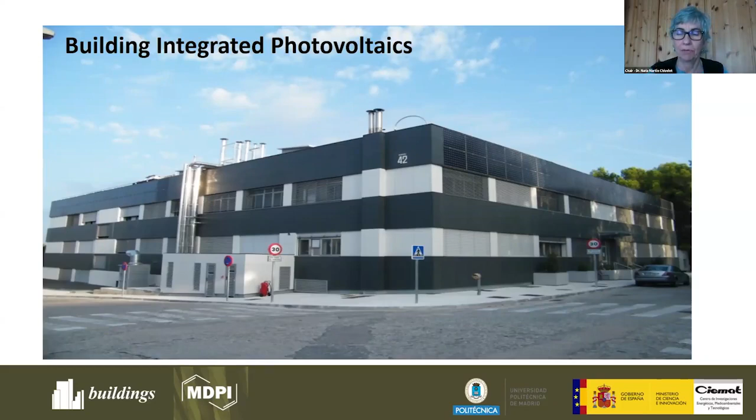So we have already seen the program, just to remind you that we will have two Q&A sessions after each presentation. And now it's the turn of Professor Lorenzo Olivieri. So Lorenzo, whenever you want, please.

Good morning. Welcome, everyone. Thank you very much, Nuria, Laura, all the staff for inviting me to join this very interesting webinar about a topic I am very passionate about. It's one of the most important research lines I'm working on for some years right now.

Today I will share with you my point of view about BIPV solutions and potential in building retrofit. When we speak about BIPV, we speak about energy, and we always have the same problem when we speak about energy.

Energy is a very abstract concept, really. We cannot touch energy, we cannot see energy, we can only see and touch the effects of using energy. So I would like to share with you some effects of using energy in order to train our sensibility, our intuition about energy-related issues.

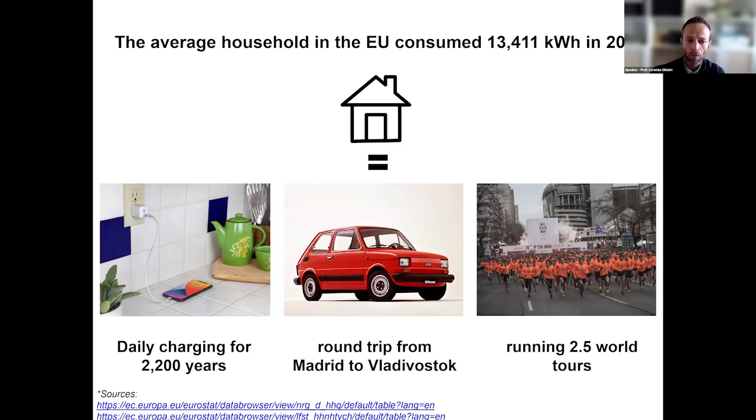You probably know that the European Union has established a long-term objective to be the first climate neutral continent by the year 2050. In order to reach this goal, an intermediate goal has been established for the year 2030. According to this intermediate goal, emissions should be reduced by 55% compared to 1990.

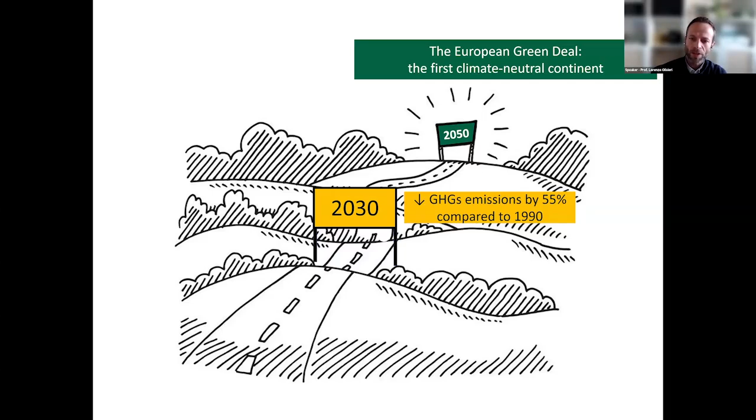So the big question here is how can we reach these very ambitious goals? Europe is working on a lot of measures in order to improve the efficiency and reduce the energy used in several sectors of our economy. There are many sectors not closely related to buildings, but there are two that are very closely related to buildings. These measures are called the Fit for 55 package.

If we have a look at the Renewable Energy Directive, it has been reviewed in order to increase the share of electricity coming from renewable energy technologies. The previous target was 32%, the new target is 42%. If we speak about buildings only, 49% of the energy used in buildings has to be produced with renewable energy technologies.

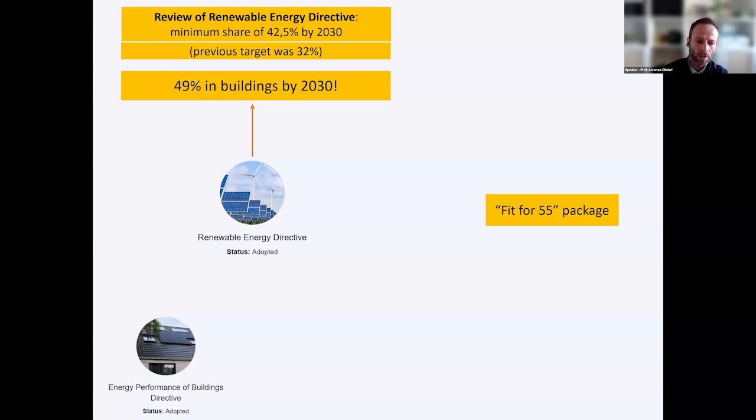The other very relevant directive we have to consider is the Energy Performance of Buildings Directive. The review of this directive establishes for the first time, in a very clear way, the role of solar energy in the built environment. So we have a long-term objective for all buildings to have zero emissions by the year 2050.

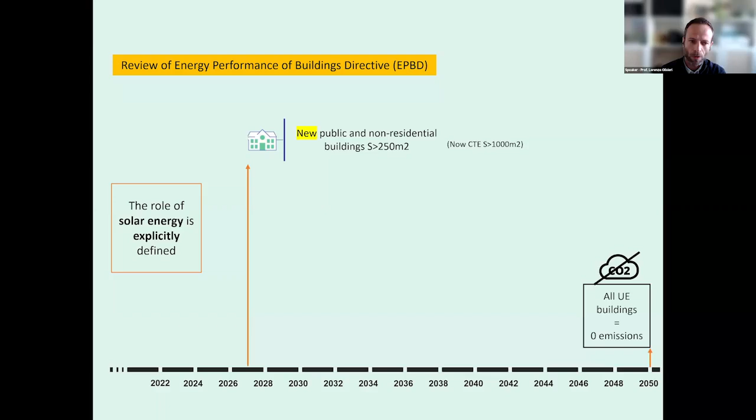Several intermediate steps have been established. For instance, for the year 2027, public and non-residential buildings bigger than 250 square meters should include solar technologies, either solar thermal or solar photovoltaics. It's not defined in the directive, but we know that solar photovoltaics use of solar energy is much more interesting and has a much bigger potential than the thermal use of solar energy.

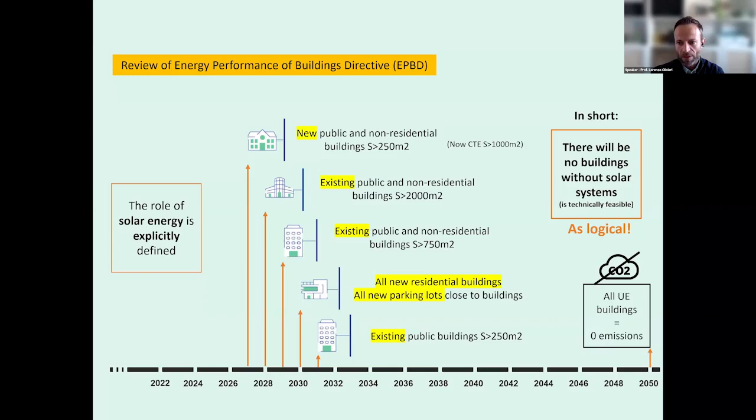In the next few years, existing non-residential buildings bigger than 2,000 square meters, and then bigger than 750 square meters, etc., will also include solar energy. So in short, we can say that there will be no buildings without solar systems in the next few years, obviously if it's technically feasible.

So we all know that rooftop PV systems, or distributed PV systems, are already a reality. You can see here in this graph the evolution of the PV capacity in recent years.

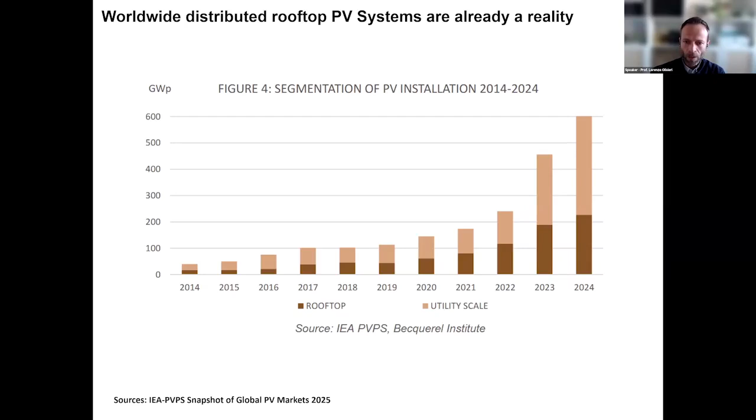About one third of the PV capacity installed is distributed PV capacity, normally on rooftop systems. So they already are a reality. In Spain, the situation is very similar, with about 500,000 self-consumption PV systems already installed, with a lot of them installed in the last 3 years.

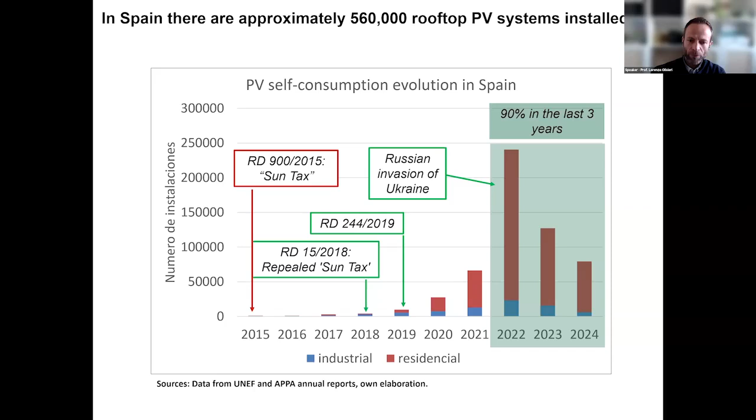So I would ask you: is this what we really want for our cities and towns? Do photovoltaic systems have to be ugly by necessity? Should we really renounce beauty for the sake of sustainability? I would share with you today that there are more options, and probably we have to increase the use of these new options, training professionals to use them.

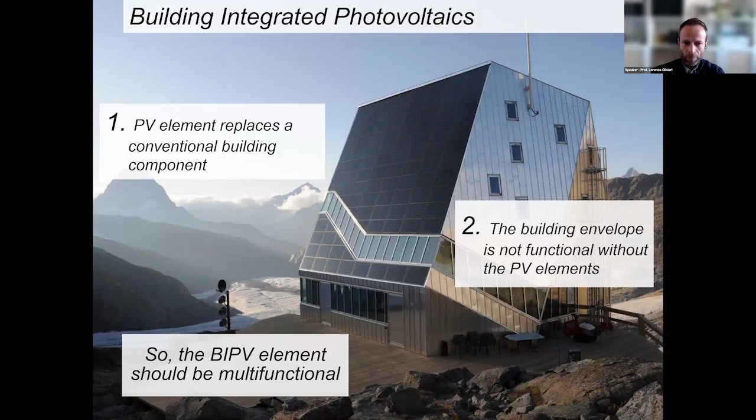This is very different from the typical system we're used to seeing in our cities, in which conventional PV modules are added to the building envelope, but the envelope is already functional without the PV elements. The PV element generates electricity—that's a lot, but it's not enough.

In my opinion, cities are the core of global climate change mitigation. The question is, what can we do to make them more compatible with our planet?

I would share with you the research project called RINGS BIPV, Innovative Global Solutions with Building Integrated Photovoltaics, which CIEMAT and UPM are collaborating on in order to spread the use of BIPV. This research project is being funded by the National Spanish Program, a research program oriented to the challenges of society.

We are working on two main projects in a coordinated project: advanced modeling and forecasting of the BIPV modules and system, mainly CIEMAT is working this topic, and Jesus will speak about this research line. The BIPV solution for rehabilitation project at UPM mainly.

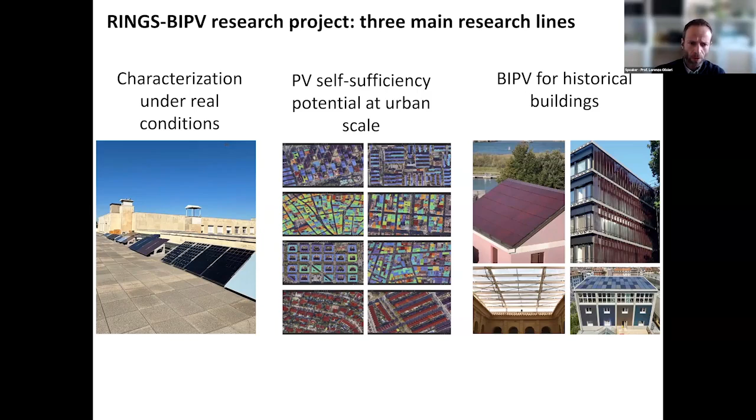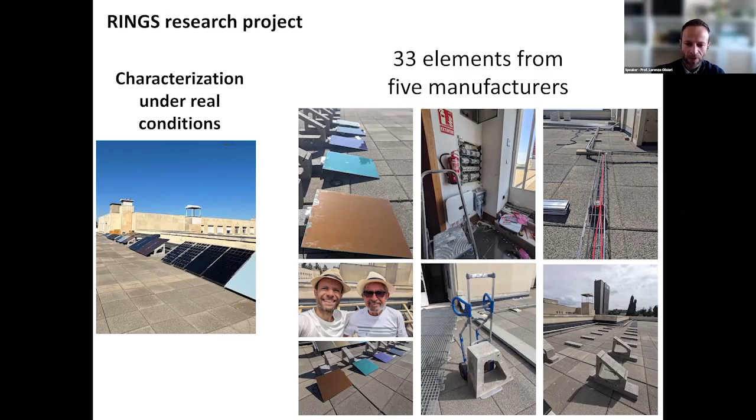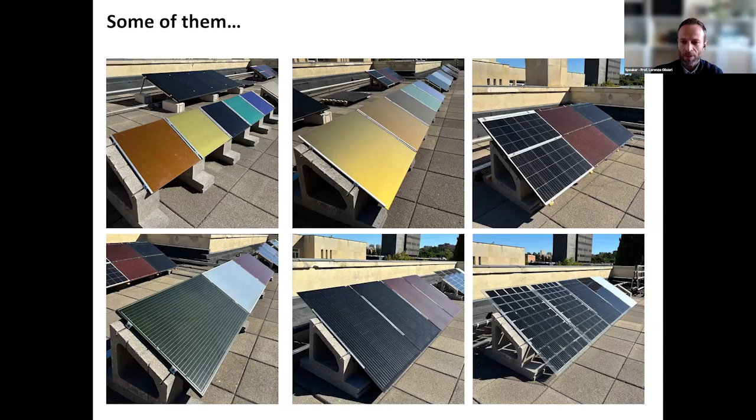I will speak briefly on the three main research lines. Regarding the first one, we have stored PV or BIPV showroom or demonstrator experimental pilot systems in order to have data about the behavior of the different solutions we have in the market. So we are comparing, for instance, electricity production, but also superficial temperature, soiling, angular losses, or degradation, in order to have data we can use to train and understand the behavior of the elements, and then use them to help architects design building integrated PV systems.

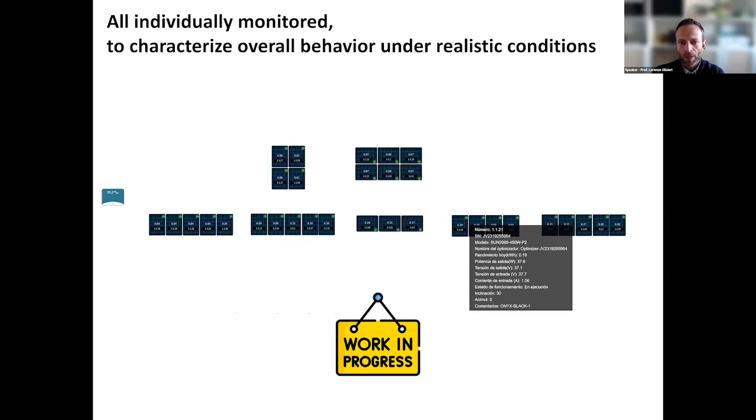So we are collecting a lot of data, we are analyzing them, and I hope I will share with you in the next months some results from this analysis.

The second research line is about the assessment of the potential of distributed PV generation in our cities. In order to compute the self-sufficiency potential, or how much we can cover the energy necessity of our city with distributed PV systems, in the first step we selected the different urban fabrics of the different neighborhoods, in this case of Madrid, but the methodology can be adapted to other places. Then we calculated the energy production and estimated the energy consumption of each building for an assessment of the self-sufficiency potential, and show the results.

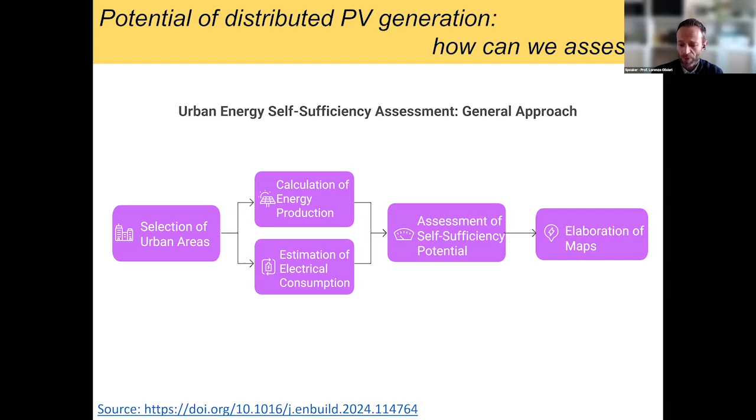We elaborated maps. So in this slide, you can see a little bit more detailed the diagram of the methodology.

I cannot explain the details, but we use a lot of different tools in order to have data on consumption and generation. For instance, we use GIS information, LiDAR imagery, PV GIS, solar irradiance databases, and so on.

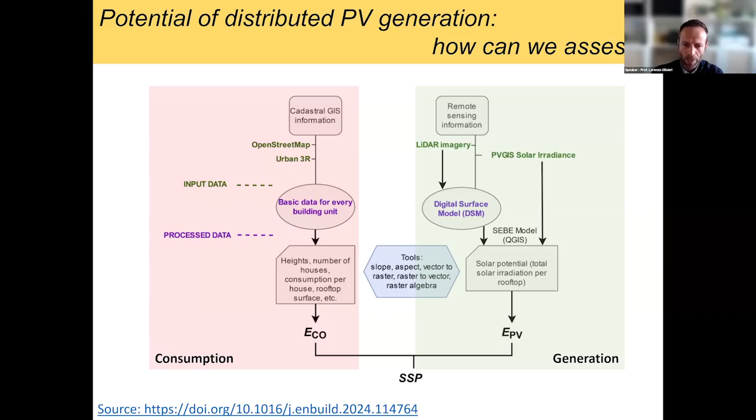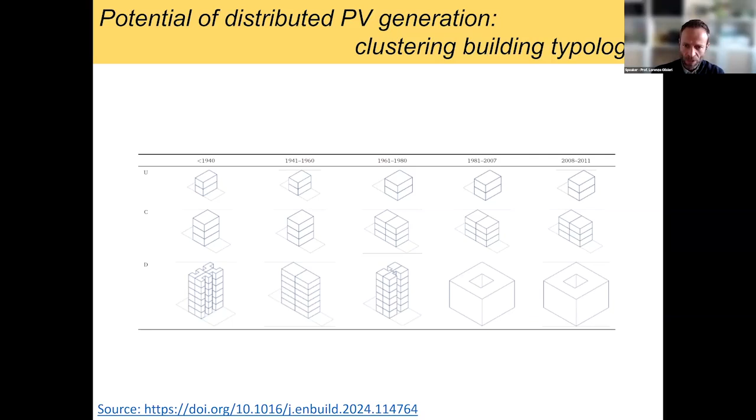With this data, we can compute the self-sufficiency potential. You can see here as an example, depending on the urban fabric of the different neighborhoods of the city, we can have as high as 90% self-sufficiency potential, or as low as 10%. Obviously, it depends on the availability of surface to generate electricity and on the electricity demand of each building.

But it's very important, from my point of view, to have some assessment, some number, some order of magnitude, to have an idea of where we can reach the potential of covering the energy demand of the city.

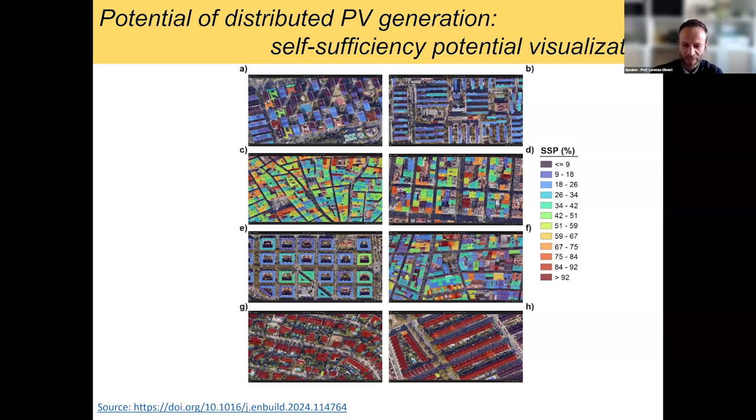Regarding the third research line, we are working on the use of BIPV for historical buildings. Why? Well, because there are a lot of historical, or in general old, buildings. In this case, we are mainly working on Europe, but also other cities. In Europe, for instance, about one-third of the buildings we normally use were built before 1945. So there is a great necessity of retrofitting to increase the energy efficiency of these buildings.

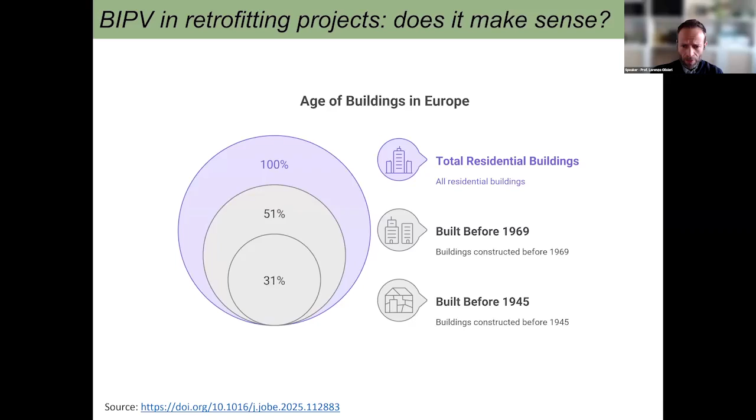To have an idea about the possibility of BIPV for historical buildings, we designed this methodology based on the analysis of case studies, in order to have a deep understanding of what we can do, what we cannot do, and what are the main aspects to consider when we think about installing PV, a very technological solution, in historical buildings. In a lot of cases these are also heritage buildings or listed buildings, so we have to have a very high sensibility according to the importance and conservation of the buildings we are speaking about.

So I would like to share with you some examples of BIPV integration in historical buildings. The first one is a residential building in Italy, a villa in Bellano.

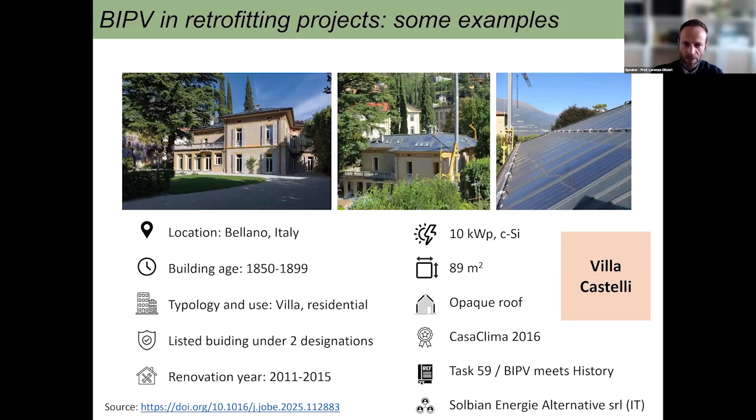You can see that it's a very old building, built in the 19th century, with ten kilowatts installed on the roof. The PV is almost invisible because the design of the system considered the importance of not changing the aesthetics of the roof. So the power is not a lot, but in this case, the PV power is really not the important thing. The important thing is showing that we can do retrofitting like this one without changing the aesthetics of the building.

The example is from Australia. In this case, it's a church, a cathedral. A new skylight was installed between the buildings with a very clear PV glass, in this case an amorphous silicon PV glass, but with a very high level of integration at the site where the skylight is installed.

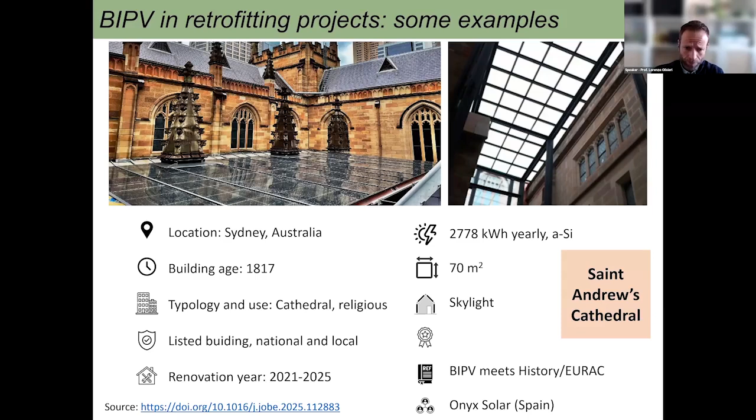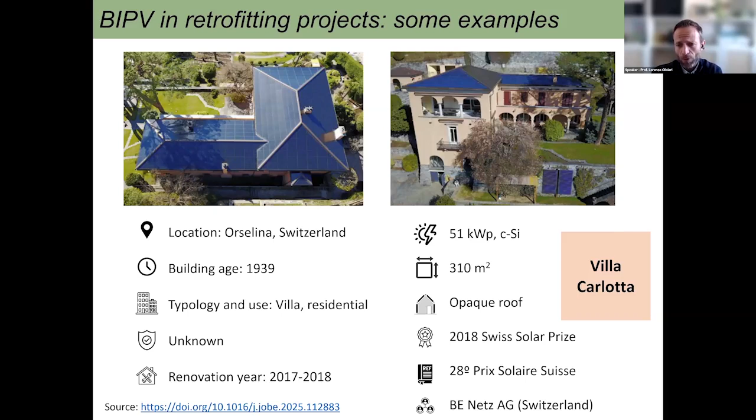This is another example of a residential building, in this case in Switzerland, in which the full roof is covered with PV elements. The PV elements serve as the cladding, the waterproofing roof layer of the roof.

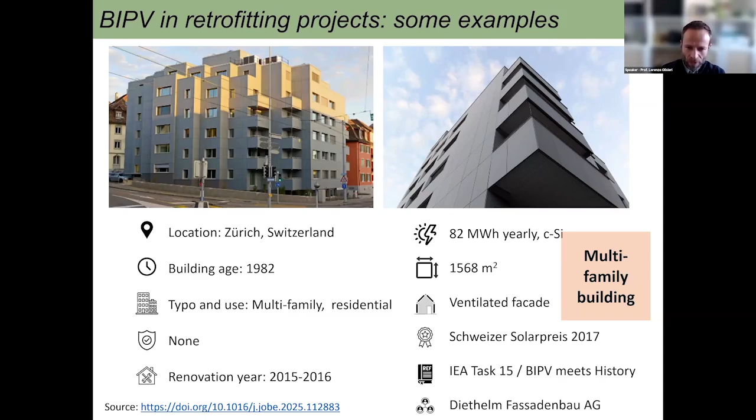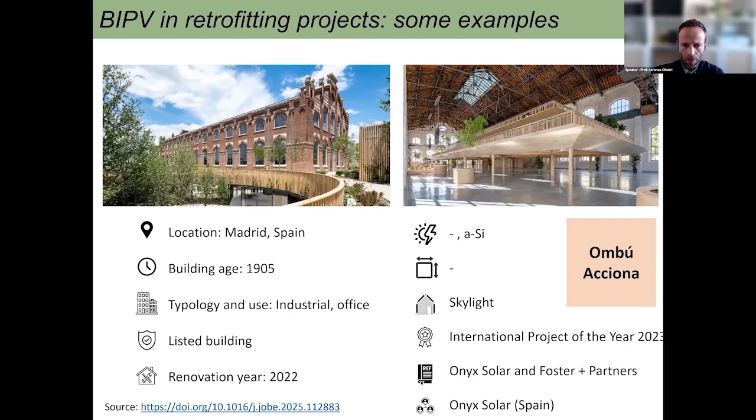So to conclude, we know that we need to improve the use of distributed systems in our cities. We need to spread the use of BIPV systems, and if the systems we design and install are also beautiful, it's even better. So thank you very much for your attention. We will be happy to answer any questions you may have in the Q&A session. Thank you very much.

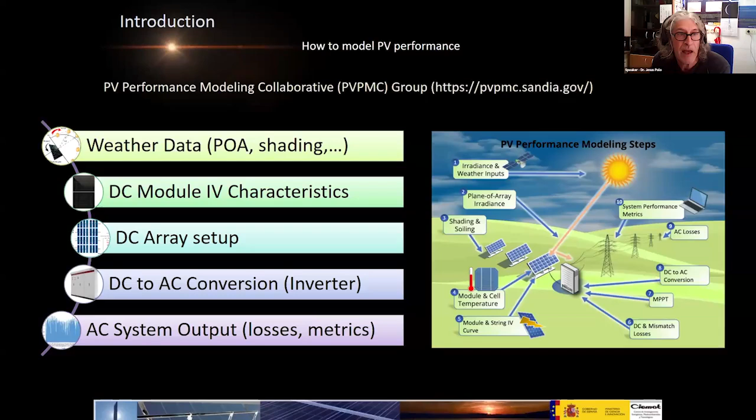A second group is focused on the electrical and technical characteristics of the modules to be used. Then we have another group referring to the array setup. In other words, how many strings do we have, the parallel or series configurations, and so on. The fourth group is for the inverters, for the DC to AC conversion, the technical characteristics of the inverter. And finally, what we are going to determine is the AC system output, and we have to consider different losses and metrics that happen in the whole process. So this is the general overview of how we normally model PV performance, and what happens in BIPV.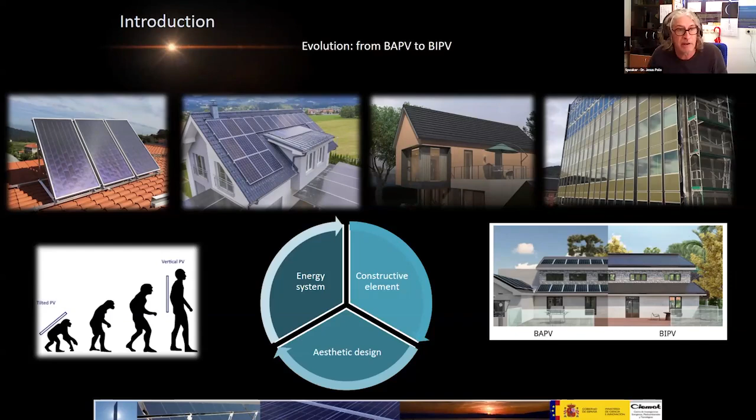So I would like to share this slide because it's like an evolution from what we know as building attached PV, which is more similar to conventional PV, placing conventional PV systems on a building. And we have seen an evolution from this situation to a complete integration of photovoltaics in the building's envelope. And this situation reflects this observation. We have a sharing between three main objectives. The energy objective, we want to generate energy. We want to generate energy and use these generators as a constructive element. So these generators must be completely integrated in the envelope of the building. And as Lorenzo has presented with many examples, we also want the aesthetic design to take importance. So these three features are, in my opinion, balanced in the role they play in BIPV.

So with this situation, we can infer that when we have to model BIPV, we are facing some challenges. Why? Because obviously BIPV is characterized by very different system configurations and very particular boundary conditions compared to conventional PV. We have many different ways of installing generators. So we have tiles, canopies, windows, rooftops, balconies, facades, many different elements with very different boundary conditions. So this is a challenge, and this is what makes the modeling strategy for BIPV conditions somehow different compared with the conventional one.

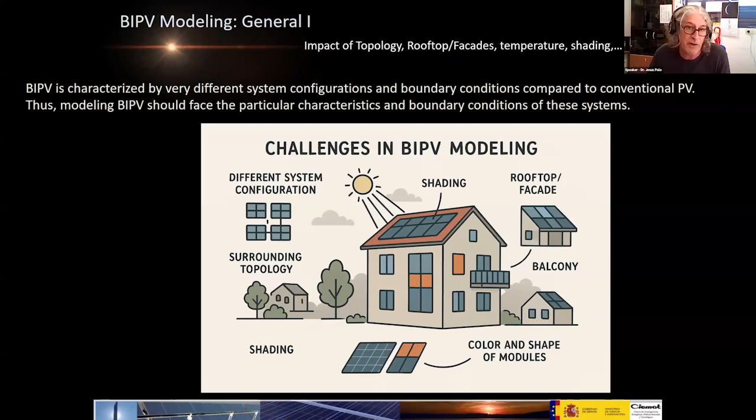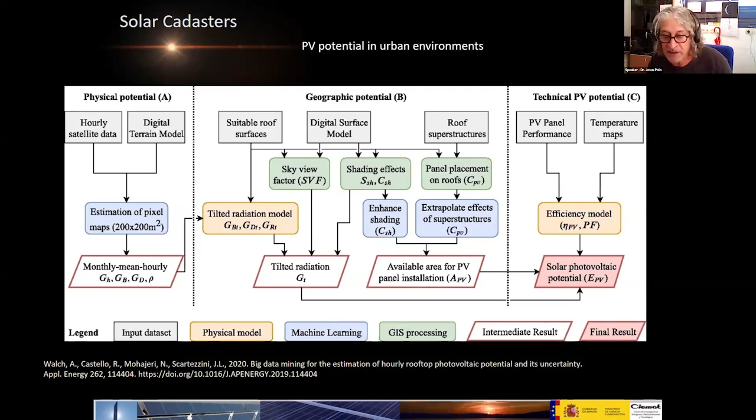or solar insolation. And in the geographical potential, we need the 3D topology to estimate the sky view factor, the shading effects by the obstacles surrounding each building. And the result in geographical potential is the solar radiation incident in each element, taking into account the surroundings. And the third step is the technical PV potential, which basically is to convert this incident irradiance for each element into solar photovoltaic potential. So we need to put the efficiency model into the equation and to convert incident solar irradiance to PV power.

So I would like to go further in this part of the modeling and to explain a little bit the methodologies for solar cadastres. Normally, as I mentioned before, we need to incorporate in the modeling information of the 3D scene. That is the heights of every building, trees, everything that is in the domain. And this is done by the digital surface model.

The digital surface model is more than a digital elevation model. It's not only the elevation of the terrain above the sea level, but we also have to include buildings, all the elements that are installed in the ground. How do we do this digital surface model? One very feasible methodology is by using LiDAR information. LiDAR information can be transformed with very available tools, with geographic information systems or libraries like LAStools, into the digital surface model, DSM.

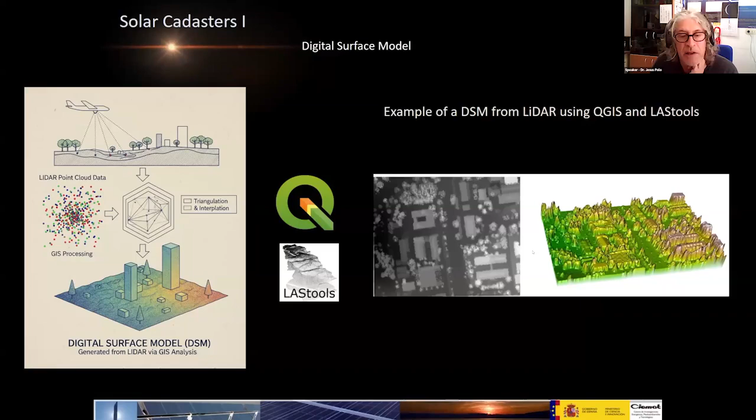This is an example of a digital surface model for part of the CIEMAT campus. You can see this digital surface model in 3D view. I would like to remark the round edges, because you can see that the buildings are not perfectly delimited, perfectly square. They are somehow rounded. The edges are not perfect. And this is related to the uncertainty of the digital surface model.

So with this information, we can make what we call solar cadastres. This is the CIEMAT campus, or this is a neighborhood in Madrid. The solar cadastre is pixel level information, as you can see here. And as Lorenzo mentioned before, we can process this pixel information and derive more advanced information, like the self-sufficiency index, which works at a cadastral level with the buildings themselves, with the building footprints, with information on the consumption of the building, the number of floors, the number of families living, and so on, with some features of the rooftops and the orientation of the rooftops.

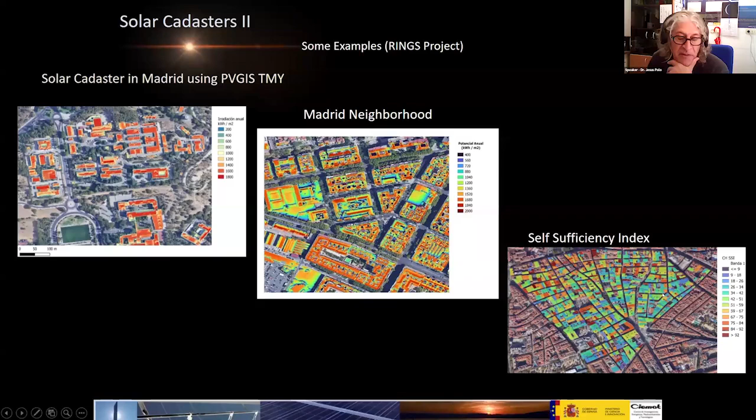And finally, the combination of this information with the solar cadastre using geographic information systems can offer more processed data like self-sufficiency or self-consumption index. So like I mentioned before, the DSM, the digital surface model, is an important part of the solar cadastre, but we must not forget that the digital surface model is uncertain.

So here is an example of two different methodologies. We have created a digital surface model with LiDAR data, or with photogrammetry, or we can use Google Earth features. And these differences at the end will create some kind of uncertainty in the estimation of the PV potential in a solar cadastre.

So we need to use a digital surface model that is as accurate as possible, and that means to fit in the building edge with the footprint of the buildings. We can combine LiDAR information with other cadastral information like OpenStreetMap or other systems to create a more reliable and more accurate building footprint.

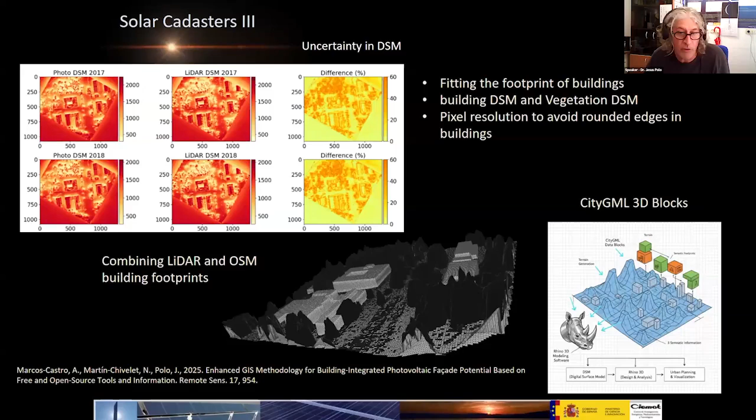And there are other possibilities. For instance, CityGML with 3D blocks. This is right now becoming almost a standard to create 3D scenes of cities or neighborhoods. So, okay, when we have a digital surface model, we can estimate more accurately the incident irradiance, which is one part of what we need in modeling a BIPV system.

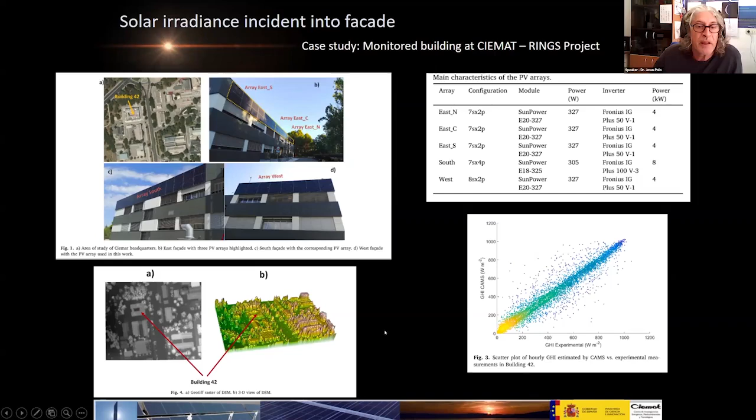This is an example of a building in CIEMAT with BIPV in the east, south, and west facade, where we use the digital surface model and satellite-derived information to compute the solar irradiance at each facade. And this slide summarizes quite well the methodology.

One part is compiling information of the solar irradiance at ground level that can be done by satellite-derived tools. For instance, PVGIS is a well-known tool, or CAMS, the Copernicus Solar Radiation Service, is another tool that delivers hourly or sub-hourly data of the main components of the solar irradiance.

We have to create a digital surface model, and these two inputs are used in a transposition model, for instance, the Perez transposition model, to convert the solar irradiance components that we receive from satellite tools to the solar irradiance incident on the surface, and in our case, on the facade. So what we call the POA irradiance, the plane of array irradiance.

We have to modify the Perez transposition model to incorporate the sky view factor, because it's a facade or a building. The sky view factor is different, because we have to take into account the topology surrounding the receiving surface. It's not like a conventional PV. Exactly. We have to take into account the shading also. And here is an example, in our building, of the sky view factor of the different facades. Here is an example of computing the shading every hour.

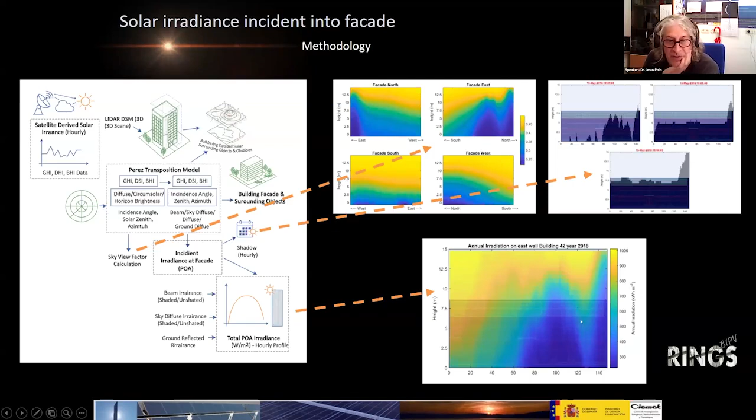And this is the east facade, which has, 10 meters away, a string of large trees. We can see here how at different times in the day the shadowing is evolving. And finally, we can compute the annual irradiation on the facade. This is one example here in CIEMAT. So this is the part of the solar irradiance.

Next step is to compute the PV performance of the BIPV system. Most of the examples I'm giving here are focused on facades, because they are real examples we are working with in CIEMAT and UPM within the RINGS project. So what about using conventional tools? For instance, System Advisor Model and PVsyst are, I would say, standards. We already use one of them or very similar tools to model PV performance.

And we can use them to model the PV performance for a BIPV system in a facade. These are just two examples of comparing SAM and PVsyst with experimental monitoring data. Here in our building, this is the south facade, and this is the west facade. You can see that we are able to reproduce quite well the seasonal behavior of the power performance.

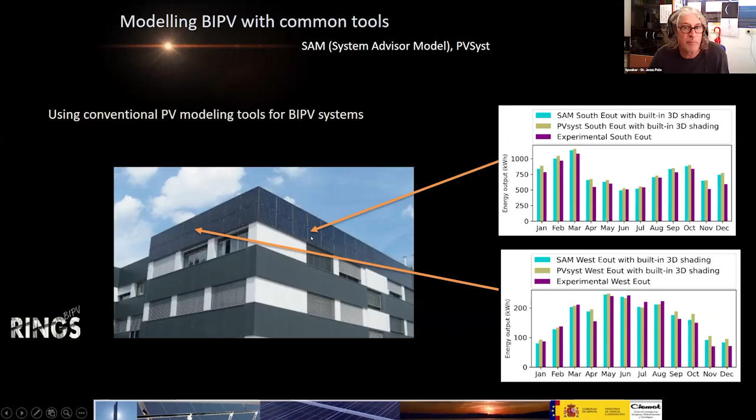This modeling is done using 1 year of satellite-derived information as meteorological input, in particular from Copernicus, from the CAMS solar radiation service. And the performance is quite good in this case because shadowing is not a big issue in these two facades. However, in the east facade of our building, the presence of these large trees is challenging.

And we can see here, if we compare the situation using SAM without imposing any particular shading in this facade, with creating shading with the 3D shading tool that is available both in SAM and in PVsyst, we can see, in situations where the shading is very important, how sensitive the modeling is to the shading condition. And when we impose 3D shading, the modeling results are much better, the goodness of fit, the accuracy is much better.

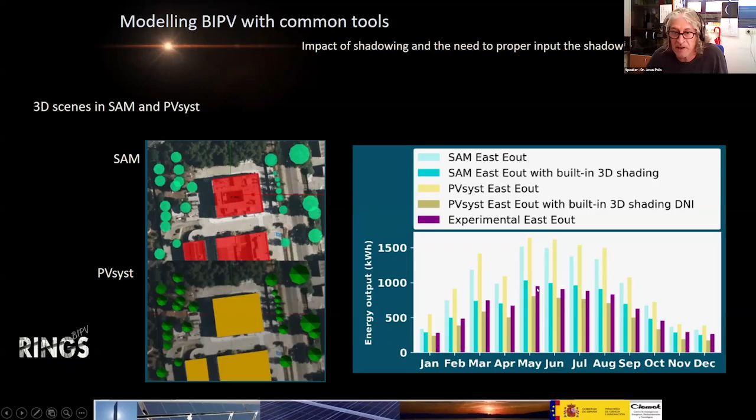These tools available in some PVsyst are probably not the best tools to compute the shading, because even when imposing some 3D shading, we still have important uncertainties. So this is another example where we incorporate the DSM, the digital surface model, into PVsyst, and how we are able to improve our results.

Here is the east facade. You can see here the PVsyst with the 3D shading tool, and when we read the topology with the DSM, we have much better results compared to the experimental one. So there is still work to do, and we have to develop methodologies to incorporate a real, closely accurate 3D topology input into the model. The better the accuracy of the model, particularly when we are facing important shading features.

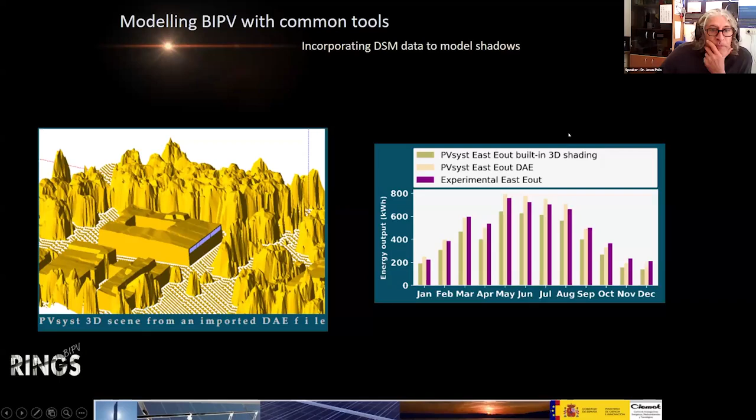Before ending, I would like to say a few words about the spectral mismatch, because we have to face the shading. This is a very particular situation that BIPV has to handle, but obviously spectral mismatches can also play a part in the modeling.

You can see here one day of the solar spectrum at different north, east, west, or south facades, comparing with the standard. We can see how the spectrum changes completely compared with the standard, where normal spectral mismatch ratings are defined in PV modules and in BIPV modules as well.

So these changes suggest that we have to use a particular spectral characterization in the case of BIPV, because the incident spectrum differs a lot compared to a conventional PV. The tilt angle, now 90 degrees, is large, and the orientation plays an important role.

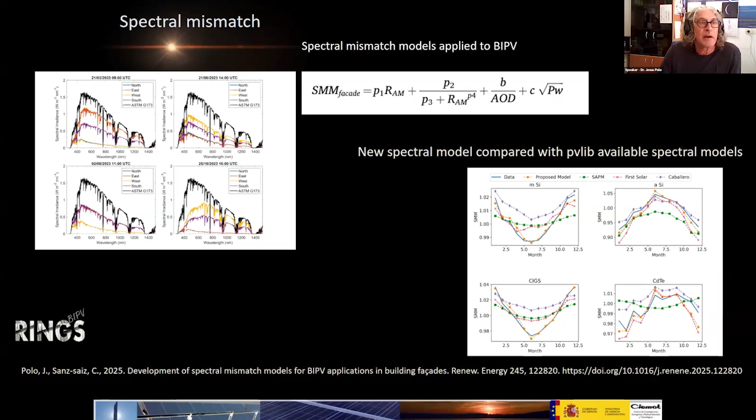So in the case of BIPV, sometimes we have to account for the spectral mismatch in a different way. And this is what I wanted to share with you.

Just to mention that the RINGS BIPV project, here is the web page. As Lorenzo mentioned before, we are working on different aspects trying to contribute to bringing new solutions that help BIPV to be incorporated into cities, and particularly in retrofitting actions.

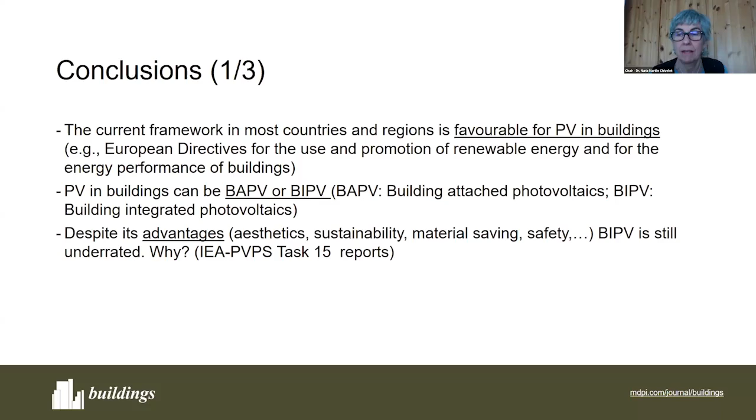There are several studies, and in particular Task 15 has gone deep into these reasons, the barriers for BIPV. But also important to say that the role of cities in climate change mitigation is very important, and BIPV is an optimal solution, especially in retrofit actions. In Europe, we have heard in the first presentation that more than half of the buildings were built before 1969, so action has to be taken in energy retrofit, and in this case BIPV can be very useful.

It is compatible with heritage buildings. We have seen good examples and a methodology to perform this kind of project. Also important are approaches to determine the PV self-sufficiency potential in PV in buildings. The next step will be in BIPV, also including facades.

BIPV potential can be reached if first we consider PV modeling and simulation tools, from weather data to system losses determination. This is a task already done for regular plants. But what about BIPV performance modeling?

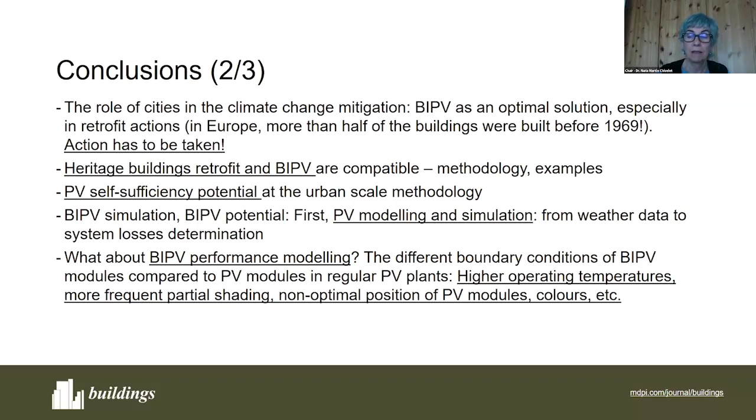The different boundary conditions of BIPV modules compared to PV modules in regular plants: for example, higher operating temperatures because of less ventilation, more frequent partial shading, non-optimal position of the PV modules, which increases angular losses, spectral losses, etc., different colors, sizes, etc. These are some features that have to be taken into account in the simulation.

So, are the PV simulation tools and building tools sufficient? This is one question, and Jesus has already given some answers to this. The first step for BIPV simulation is always solar radiation determination, and in this sense solar radiation maps for building envelopes are very useful, solar cadastres, and so on. There's a lot of work undergoing here and very interesting perspectives for the future.

We have already seen that the digital surface model can improve the modeling results of available tools. So this is a first step. As a general conclusion, I would say BIPV can play a relevant role in the design of future cities, although there are still several barriers to overcome, and there is margin also for research, development and innovation.

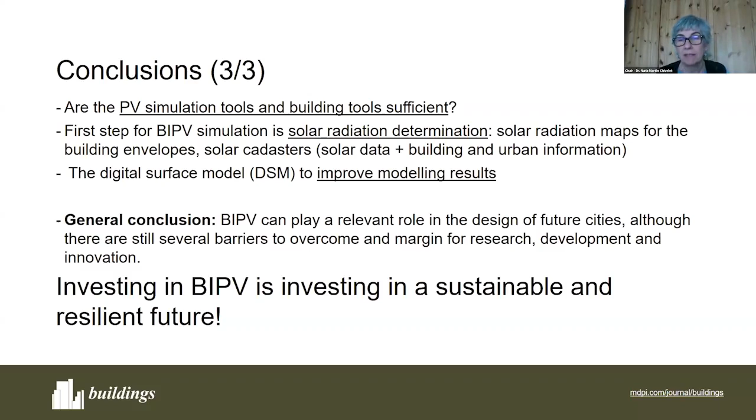So I encourage you to invest in BIPV, because it means investing in a sustainable and resilient future for the cities. Thank you very much for your attention.